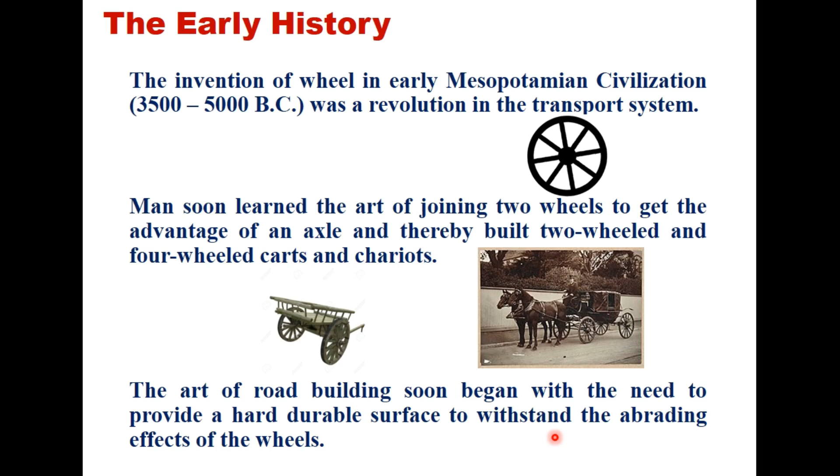If you look at the early history of roads around the world, it starts with the Roman roads, then the French roads, Metcalf Road, Telford Road, and Macadam's Road. I'll just devote a few seconds to each of these.

The Roman roads were constructed in the 8th century BC, and Romans are considered pioneers in road construction. The Roman civilization was well known for the good road system it built, and about 100,000 kilometers of road network served the military and administrative purposes of the Roman Empire, extended over vast regions. Rome was the focal point from where 29 major roads radiated in all directions, and probably this is the reason why it is called 'all roads lead to Rome'.

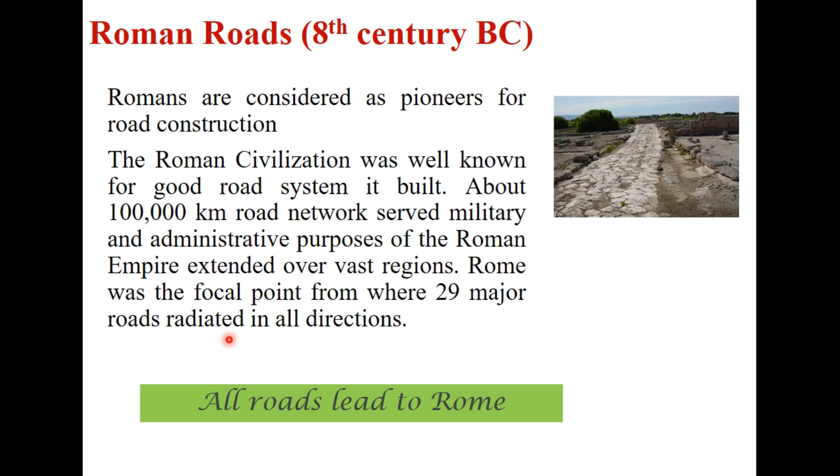In the Roman system, it was a layered system, but very thick, 100 to 150 centimeters. The foundation soil was compacted properly, and above that there was a layer of statumen, a layer of crushed rock around 25 to 60 centimeters thick. Above that was rudus, a 20 centimeter thick layer consisting of crushed rock 5 centimeters in diameter in cement mortar. Above that there was a layer of nucleus, a concrete-based layer made of cement, sand and gravel, also around 30 centimeters thick. Finally it was summum dorsum, the final layer consisting of large, 15 centimeter thick rock blocks. That was the Roman road in the 8th century BC.

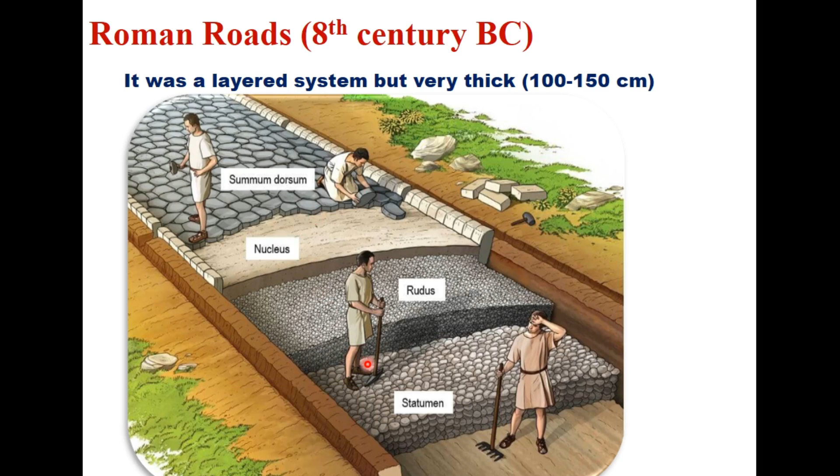After the fall of the Roman Empire, their technique of road construction did not gain popularity in other countries, particularly because of its very heavy structure. Therefore, Tresaguet developed several methods of road construction which were considered advantageous and meritorious compared to Roman roads. The main feature of the proposal was that the thickness of construction needed to be only 30 centimeters, and side drains were also provided in all these roads.

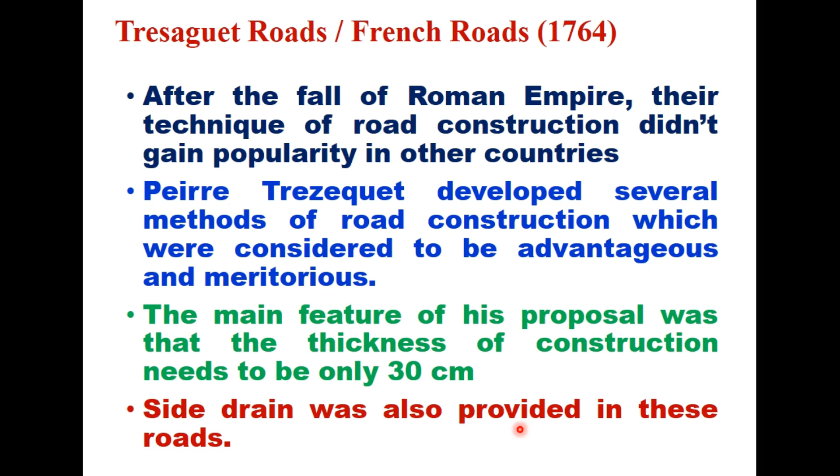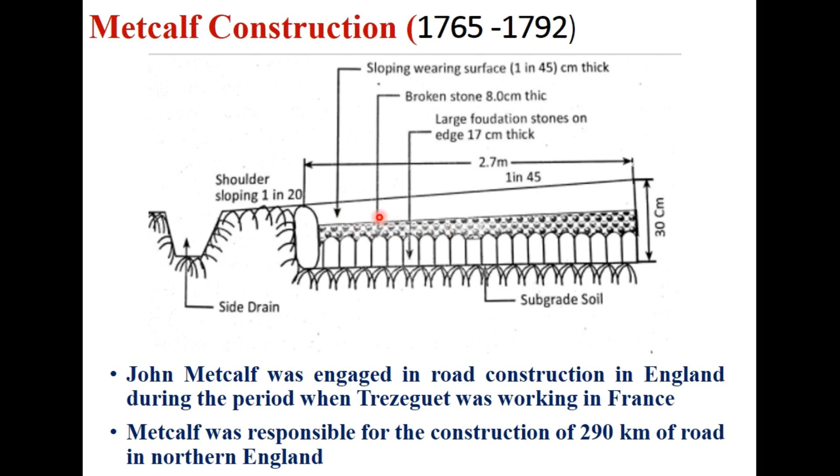Metcalf, during 1765 to 1792, was engaged in road construction in England during the period when Tresaguet was working in France. Metcalf was responsible for construction of almost 290 kilometers of roads in northern England. This was the cross-section of the road suggested by Metcalf: the top surface is given a slope of 1 in 45, which is what we call today the camber. This camber is more or less similar to what we provide even on our national highways or state highways today, that is 1:40 to 1:50, here it is 1 in 45. The sub-base was large foundation stone, above that broken stone of 8 centimeter thickness, and finally a sloping wearing surface at a slope of 1 in 45.

Now, Telford construction, during 1757 to 1834. Thomas Telford was the founder of the Institution of Civil Engineers at London, and he began road construction in the early 19th century. He used heavy foundation above the soil subgrade and provided cross slope on the top surface by varying the thickness of foundation stones. The important consideration here was that cross drains were also provided at an interval of 90 meters.

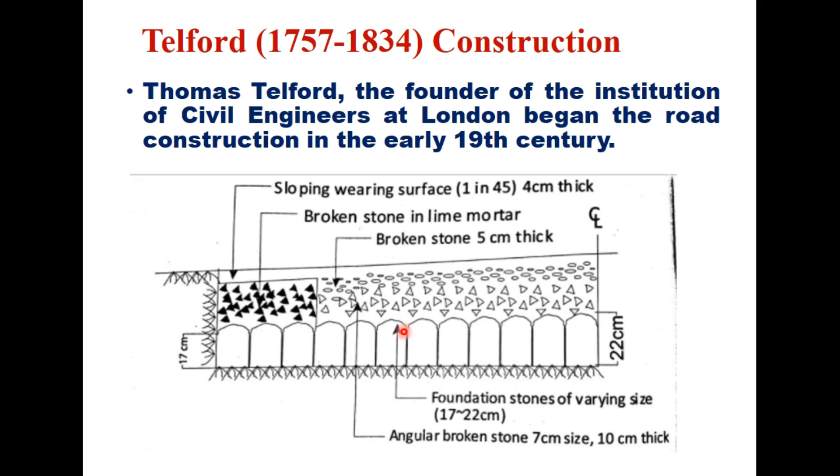During this period, there were different stages of road development, but among all these, Macadam Road was the most successful. John Macadam, who was Surveyor General of Roads in England, suggested an entirely new method of road construction on a scientific basis. He realized that the stresses due to wheel load decrease at the lower layers, so it is not required to provide thick pavement layers. The importance of subgrade drainage and compaction was recognized, so the subgrade was compacted and prepared with a cross slope, starting right from the subgrade level. So it's a compacted subgrade, and above that broken stones passing a 5 centimeter sieve, thickness 10 centimeters, and above that broken stone and the surface course with stone. The total thickness is only 25 centimeters.

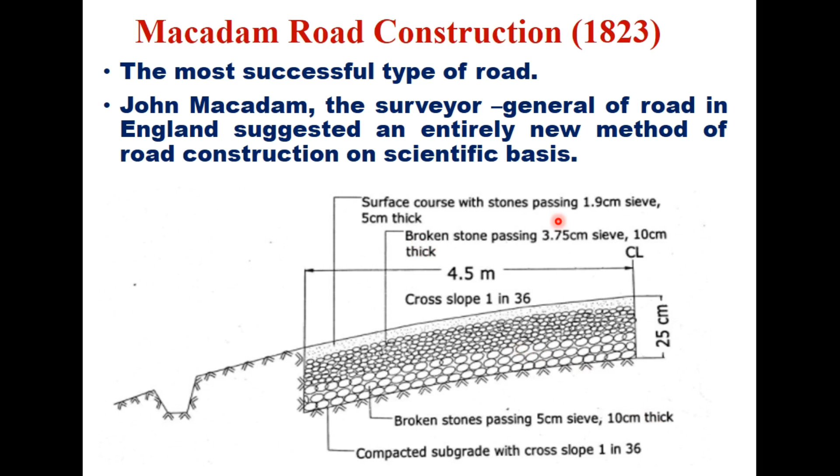If you look at early civilization in India, the Mauryan emperors built very good roads during 321 to 185 BC. Chandragupta Maurya constructed around 2,400 kilometers of roads across the subcontinent, connecting Patliputra to Takshila. Kautilya, the great administrator of that time, laid down the standard width of various classes of roads.

A Greek ambassador, Megasthenes, wrote that Mauryan rulers were great road builders. Special care was taken to repair the roads. Trees were planted along the roads to give shade. Wells were dug and rest houses were provided for the comfort of the travelers.

After the Mauryan Empire, the Gupta period was there from 320 AD to 467 AD, and that was the golden era of Indian history. Roads received a great impetus. A Chinese visitor, Fa-Hien, who visited India in 405 AD, traveled widely on Indian roads and has left impressive accounts of the road system. He was particularly impressed by the security and comforts provided to the travelers.

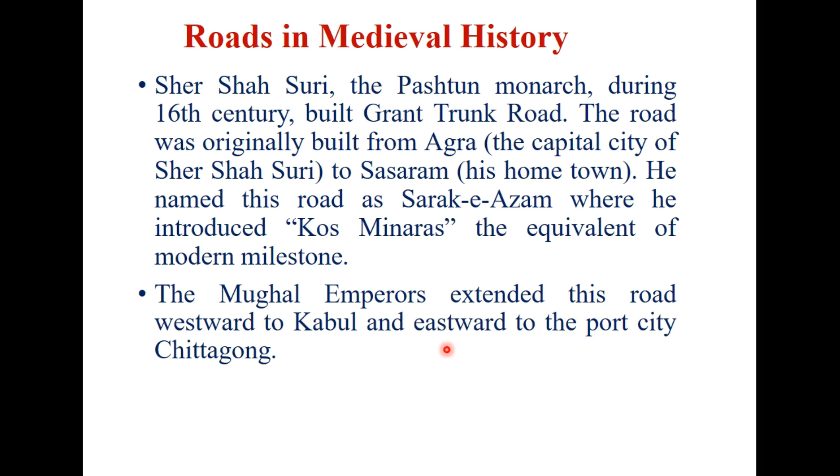The period covering the decline of the Mughals and the beginning of the British rule was a period of neglect of road systems in India. Lord Dalhousie organized the formation of a provincial PWD in place of the military board in 1885 for maintenance and construction of roads. Specifications were framed for construction of roads in India. As a result, a good system of trunk roads in the country existed by the end of the 19th century.

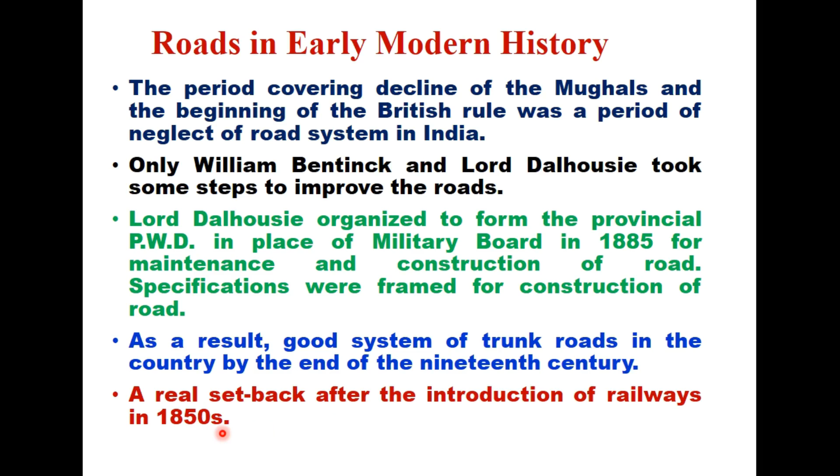A real setback to the road system came after the introduction of railways in 1853. The Grand Trunk Road from Calcutta through Delhi to Peshawar was rebuilt at a cost of £1,000 per mile. Roads from Bombay to Pune, Bombay to Agra, Bombay to Madras were also constructed during the period 1833 to 1866.

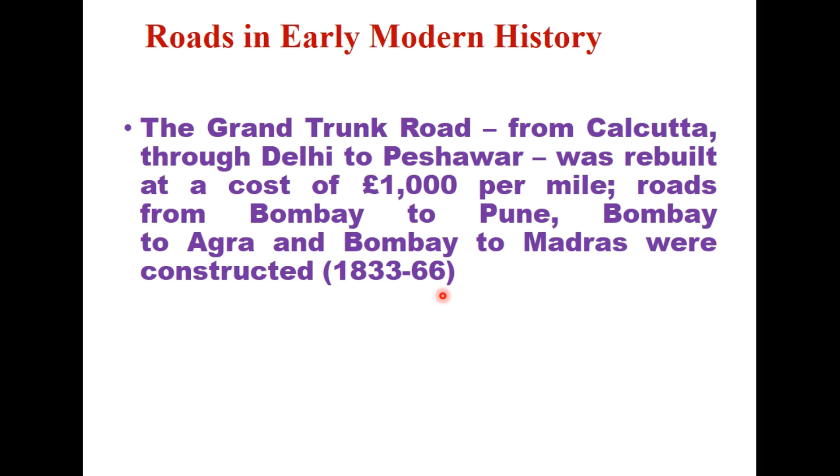That was also the time when the Public Works Department and Thomason College of Civil Engineering, Roorkee, were founded to train and employ local surveyors, engineers and overseers to perform the work and maintain the roads. This program resulted in an estimated 2,500 kilometers of metalled roads being constructed by the end of the 1850s.

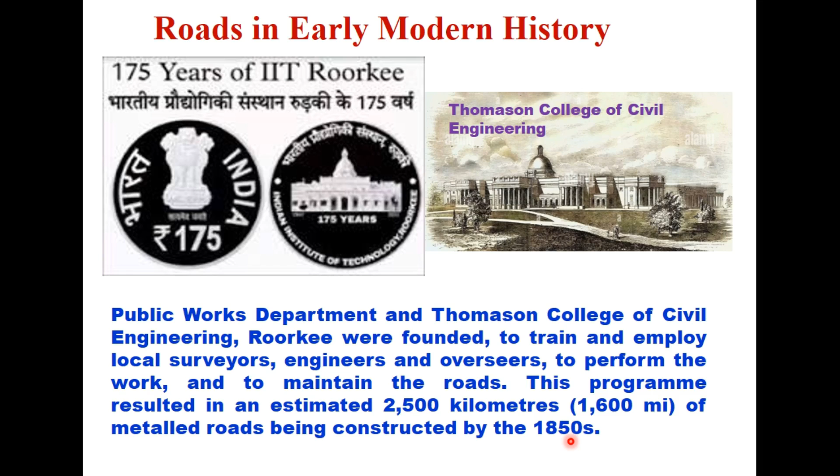Railway was introduced in 1853. The need of administration and military was adequately served by railways. Primitive road transport means were limited to horse carts and bullock carts only, whereas railway was a quicker means of transport. Therefore, the time between 1853, the advent of railway, and 1897, when the first car came on Indian roads, was the darkest period in the history of roads in India.

After the First World War, there was a rapid growth in motor transport. The pneumatic tired vehicles caused rapid deterioration of Indian roads, which were already in a very sad state of neglect due to lack of government interest and inadequate finance at the command of the local bodies.

Voice for better roads was raised in the Council of States. The Government of India appointed a committee called the M.R. Jayakar Committee in 1927. The mandate of this committee was to see the desirability of a road network and the finance role of states and the central government.

The committee said that development of the road system is beyond the financial capacity of local government and therefore should be charged on central revenue and taxation system. As part of the recommendation of this committee, the Central Road Fund was set up in 1929.

The subsequent development was the formation of the Indian Roads Congress in 1934 to frame guidelines and standards for road construction in India. The Nagpur Road Plan was drawn for 1941 to 1961, and the basic target of this plan was to have a road length of 16 km per 100 square km area of the country.

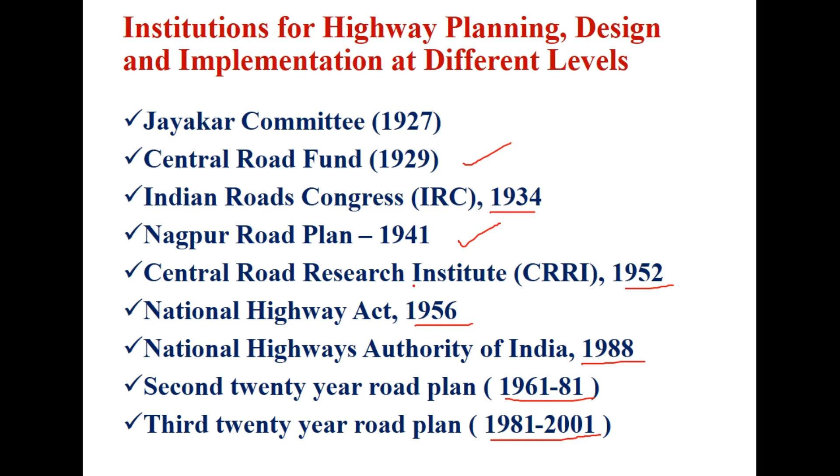The Nagpur Road Plan fixed a target of 16 km per 100 square km area of the country. The second 20-year road development plan, the Bombay Plan, set the target of 10,57,330 km road network in the country, with National Highway, State Highway, MDR, ODR and village roads.

Provision of good communication in rural areas is essential to check increasing urbanization. Strategic needs in economic, industrial and agricultural sites are to be duly taken care of, and targets for every category of roads were set based on some rational formula.

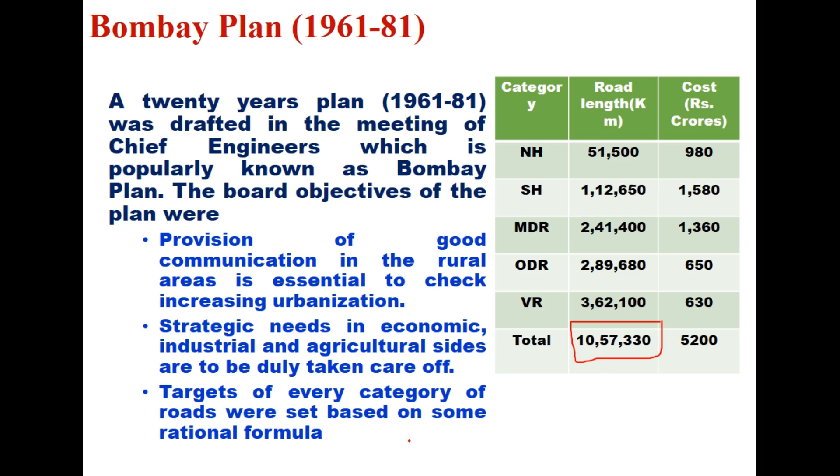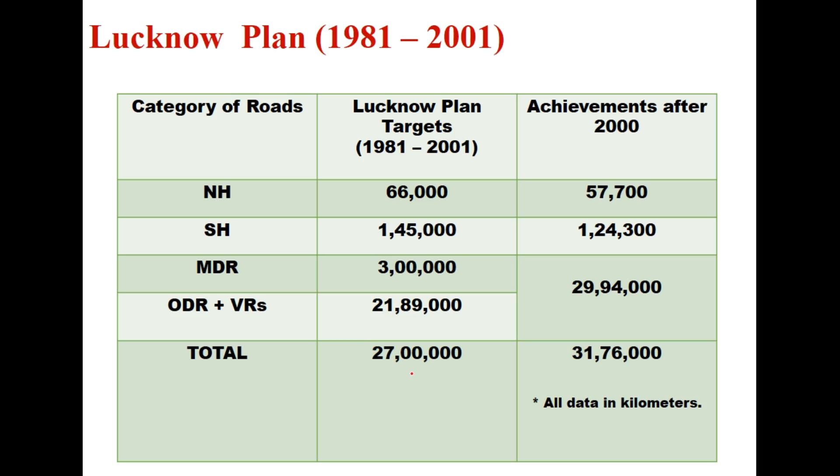During 1981 to 2001, the Lucknow Plan, the third road development plan, enhanced targets for National Highway, State Highway, major district road, other district road, plus village roads, with a total target of 27 lakh kilometers of road network in the country.

The National Highways Authority of India was constituted by an Act of Parliament in 1988, but this authority became operational only in February 1995. Since then, NHAI has implemented several projects of national importance, and the length of national highways in the country has increased tremendously over the last 3 decades.

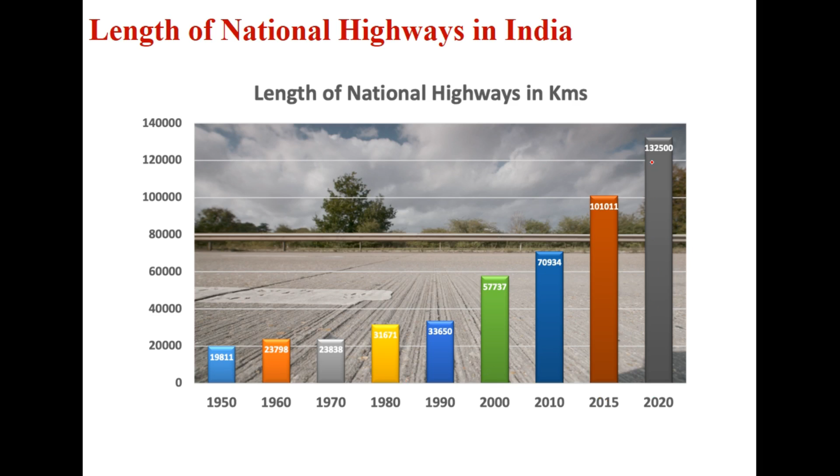In 1950, there were only 19,811 kilometers of national highways, and in 2020, this length increased to 132,500 kilometers.

The financing of roads in the country, as a recommendation of the Jayakar Committee, the Central Road Fund Act 1929 was enacted by levying a petrol cess of 2.64 paisa per litre, with 20% of this money retained by the center for research and experimental work, and 80% given to states in the ratio of petrol consumption. Now it is rupees 18 per litre as Road and Infrastructure Cess.

The CRF Act 2000, further amended in 2017, is now the Central Road and Infrastructure Fund Act. The distribution of high-speed diesel oil and petrol cess is such that 39% is retained by the central government for development and maintenance of national highways, 2.5% for development and maintenance of waterways, and the remaining for development of state roads and rural roads in the country.

Banks have been the conventional loan providers for road projects in India. However, in the past few years, several long-term investors have emerged in the market, and their preferred route of investment is toll-operate-transfer bundles, where the investor gets the right to collect tolls from the road project for a long duration to recover the money.

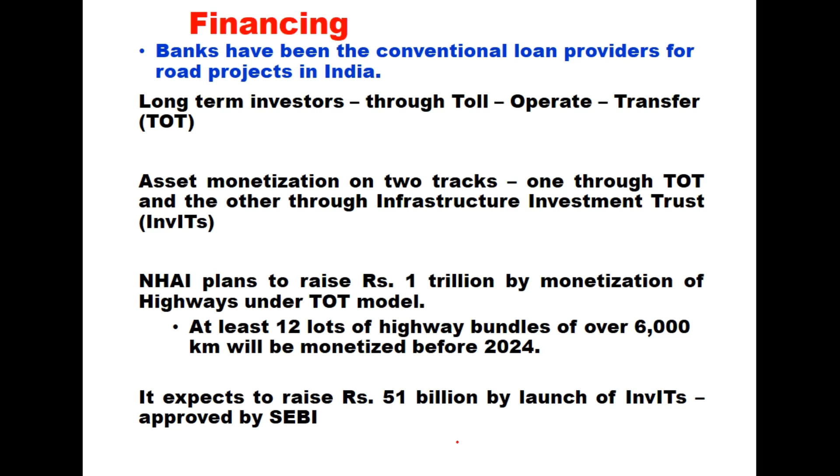The scale of road construction in India has increased, and in November 2020, the total road length in the country was 5.897 million kilometers. The road connectivity in rural areas is almost 91%.

The national highway network stands at 132,500 kilometers in 2020, and the speed of construction of national highways in the country was 27 kilometers per day in 2017-18, which is now around 30 kilometers per day. In rural areas, during 2017-18, the NRRDA constructed around 134 kilometers of road per day.

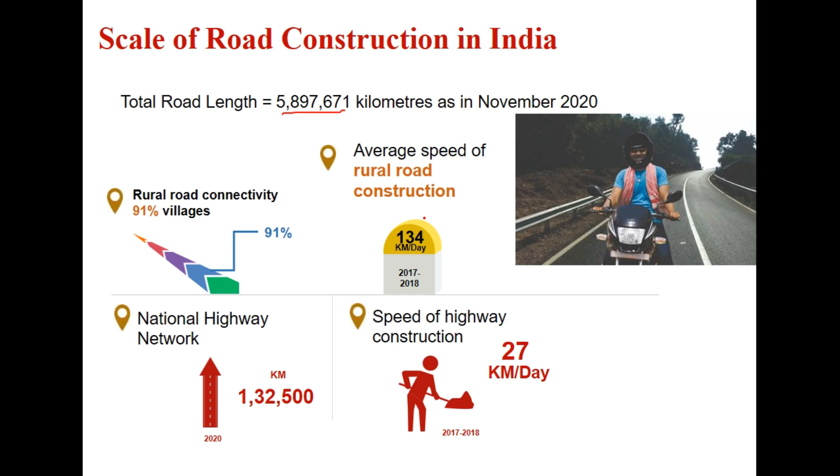Coming to advanced technologies in road construction, there are several technologies being used nowadays in modern road construction: plastic waste in bituminous layers, warm mix technology, cold mix technology where you can make a road at ambient temperature without heating binder or aggregate, recycling of pavements, geogrid and geotextile in pavement construction, new generation additives for soil stabilization, waste materials and porous asphalt.

Almost each of these technologies has now become a mainstream technology, and the majority of them are being used in India and in many other countries.

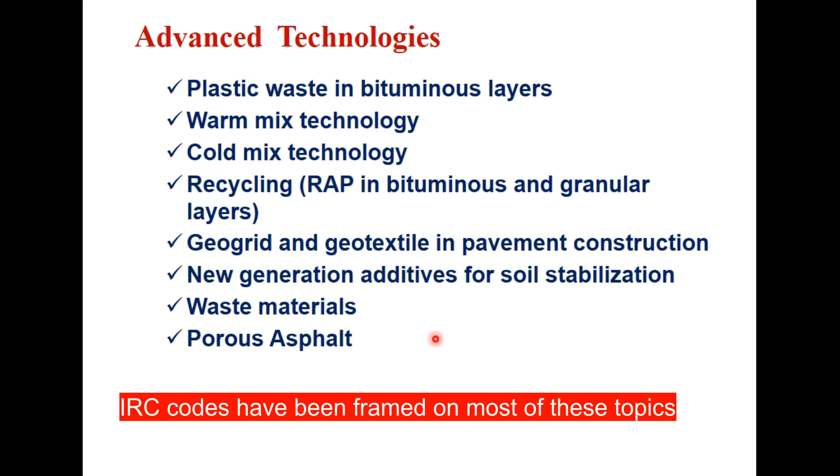Many of these technologies have been discussed in different sessions in my YouTube channel. But there are certain futuristic technologies which should be discussed here: self-healing pavements, precast roads, solar roads, and plastic roads, fully plastic roads.

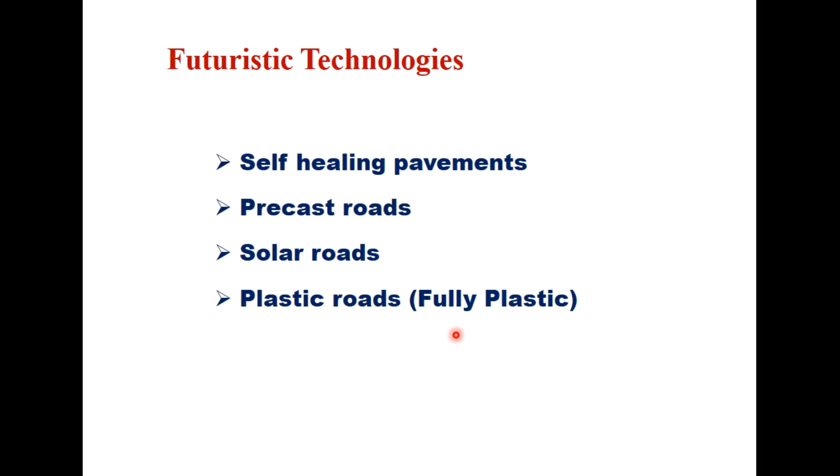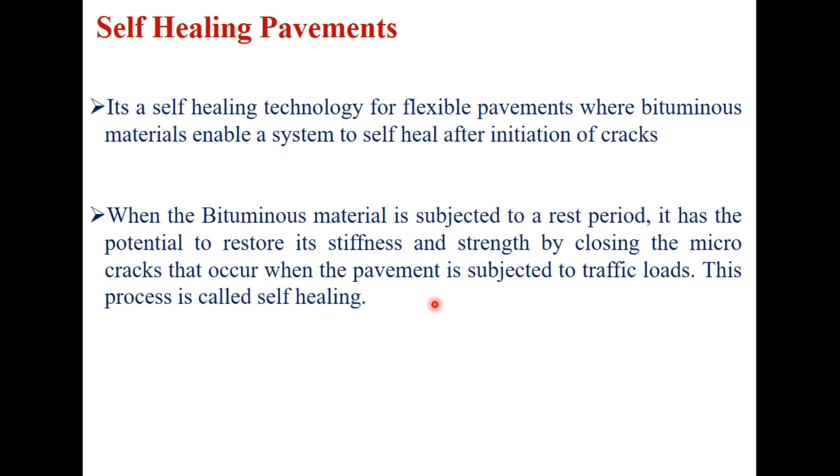The self-healing pavement is a self-healing technology for flexible pavements where bituminous materials enable a system to self-heal after initiation of cracks. When the bituminous material is subjected to a rest period, it has the potential to restore its stiffness and strength by closing the micro cracks that occur when pavement is subjected to traffic loads, and this is called self-healing.

There are several materials used as self-healing materials in bituminous construction: use of nanoparticles like nanoclay or nanorubbers, or it can be rejuvenators like microcapsules, binder healing agents, or byproduct of waste cooking oil. It can also be achieved through induction heating of bitumen containing conductive fibers and fillers.

Microcapsules are embedded throughout the bituminous mix, and whenever there is a crack, the top surface of the pavement is heated through induction, and these fibers or capsules melt and heal the crack.

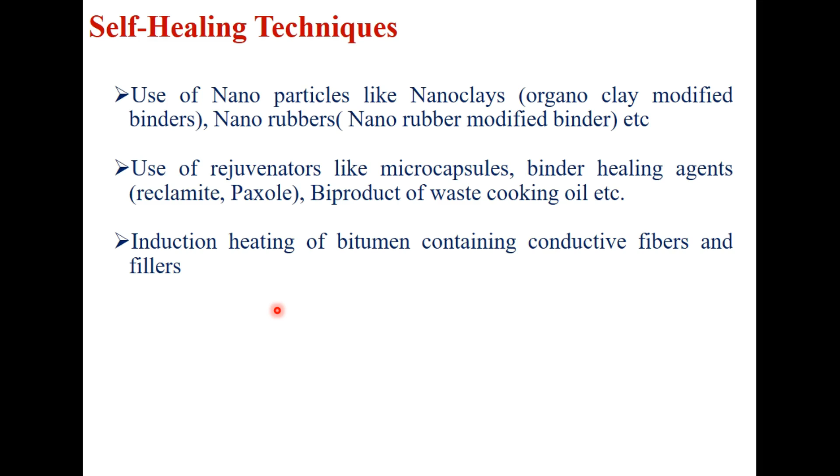Precast concrete roads. This is a serious need of the country today, for rapid and long-lasting construction, repair and rehabilitation of concrete pavements under heavy urban roads or in far-flung areas of the country. In a conventional method, when traffic is opened after 7 days of curing, the concrete does not gain its full strength, and therefore it results in shorter service life.

Closure of the road for a long time to get the full strength of the concrete is many times not feasible or not practical. Therefore, the need is to have precast concrete slabs that can be cast in yards and transported to the site and fitted on the road.

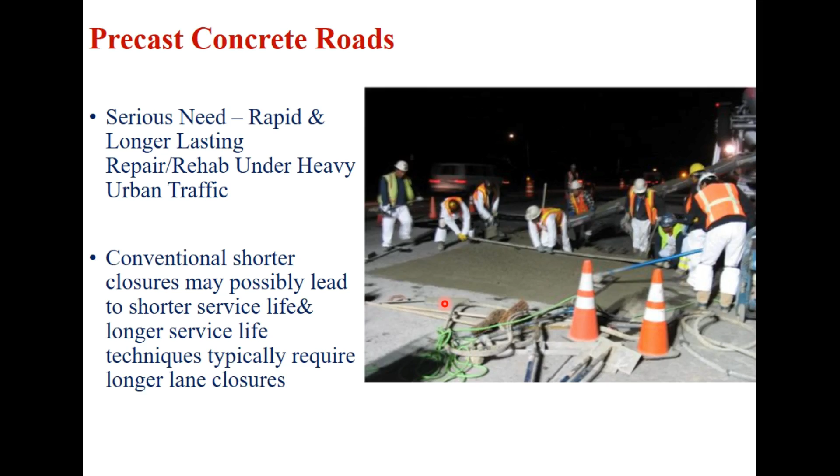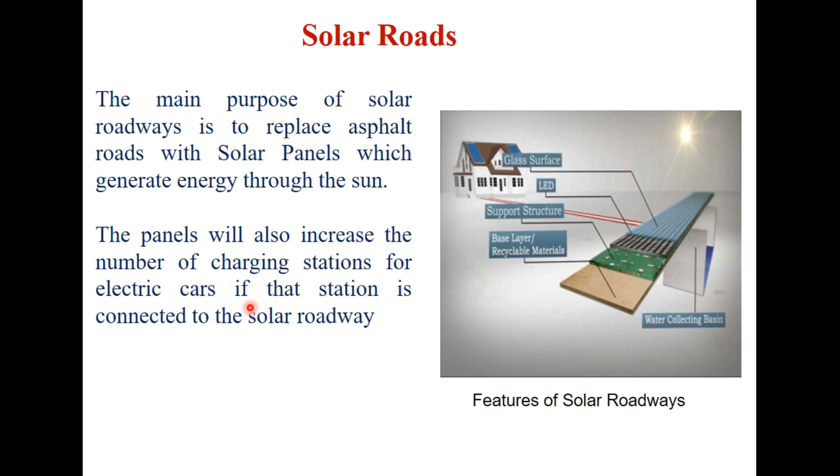The solar roads. The main purpose of solar roads is to replace asphalt roads with solar panels which can generate energy through the sun. These panels will also increase the number of charging stations for electric cars if that station is connected to the solar roadway.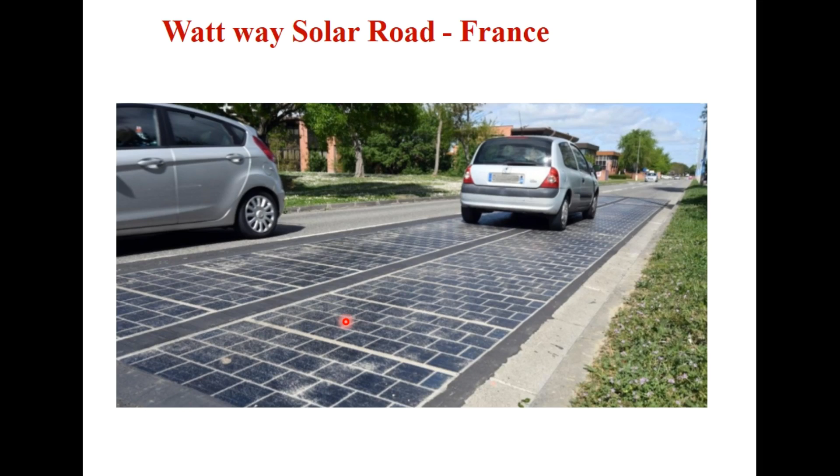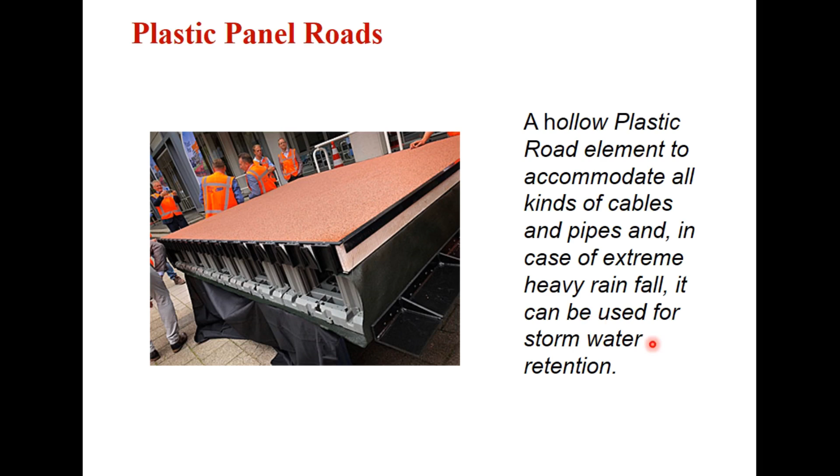Another one is plastic panel roads. This concept consists of a prefabricated, modular and hollow road structure based on recycled plastic. The plastic roads are made entirely of plastic or of a composite of plastic with other materials. These hollow plastic road elements can accommodate all kinds of cables and pipes, and in case of extreme heavy rainfall, they can also be used for storm water retention.

An experimental bicycle track of 30-meter length has been made from recycled plastic in the Netherlands as part of a project that could lead to more sustainable roads.

Another one is smart roads. Smart highways are the future of transport, and it involves using sensors and IoT technology to make driving safer and greener. They give drivers real-time information regarding traffic, congestion and parking availability, for example, and also weather conditions.

The idea here is that each vehicle should communicate with all other features of the road. There should be communication between vehicle to vehicle, communication between vehicle and roadside unit, communication between vehicle and pedestrian, communication between vehicle and the mobile network, and also to GPS.

That is the ultimate aim of the intelligent transport system: that there should be no fatality, no crash, no collision between vehicles and between vehicle and pedestrian.

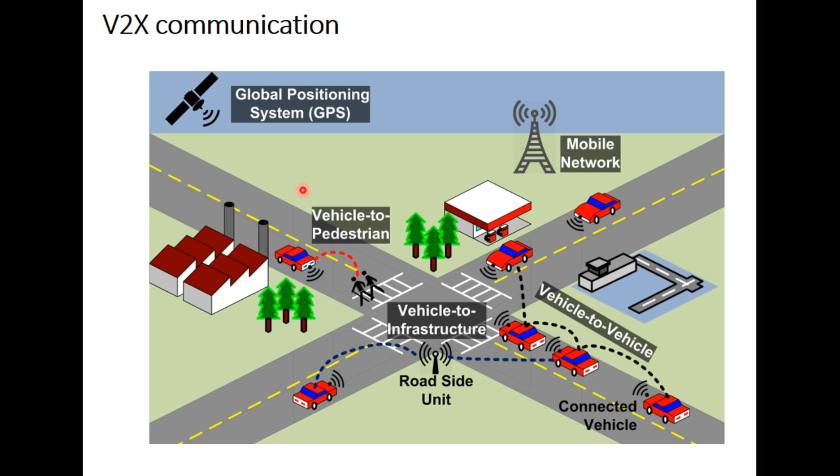Another one is anti-icing roads. Traditionally, de-icing methods to protect road surfaces against slippery conditions are to distribute salt and sand on the road.

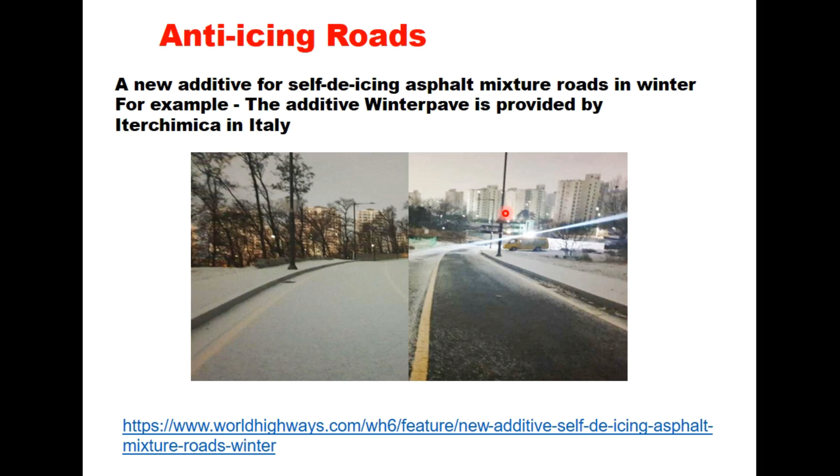Now the emphasis is on anti-icing rather than de-icing. De-icing is to melt the ice on the road surface, while anti-icing is an action to prevent ice formation on the road surface. Anti-icing additives are being developed to prevent the problem of snow on road surface, and these are now coming up in the market.

So friends, I will close this discussion here with the well-known statement of J.F. Kennedy, the President of USA, that it is not our wealth that built our roads, but it is our roads that built our wealth. Thank you very much for watching.